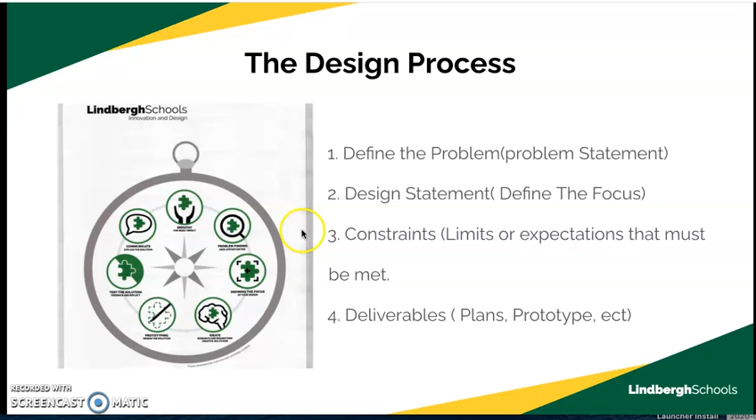The next step would be to draw those 3 design sketches. We're going to ideate, we're going to think through the problem. The design sketches should be neat, but at this point on a sketch you don't necessarily have to use a ruler or be as precise, but you still need to be neat.

You need to be able to show your ideas so that somebody else looking at your idea understands it. You don't want it to be sloppy, you want it to be neat. The step after this would be, I'd like for you guys at this point to make 3 design sketches, 3 ideas. You can do this by hand, drawing it, or you could do it digitally.

Now, in the past, we've used a program called West Point Bridge Designer, but it's only available on a PC, and we have iPads. So if you can come up with a good digital alternative to hand drawing, feel free to do that. I'm just not sure, I haven't done enough research with the iPad to see what's out there. But if you find something, share that with me, and I'd be glad to let you use it.

Once we've come up with 3 sketches, then we need to take the design that we like the most and you're going to have to actually draw this to nice scale dimensions. You want to make sure that your design is symmetrical, meaning one side of your bridge needs to be exactly the same as the other side of the bridge.

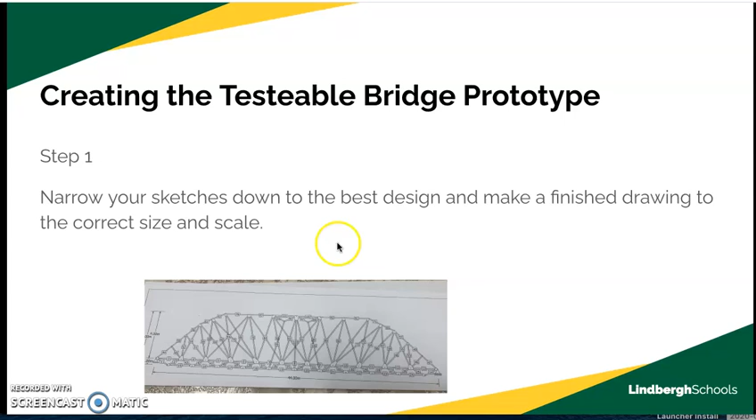Preparing the work surface. Once we have our finished drawing, drawn to the exact size, between 12 to 13 inches, 2.5 inches in depth, we are going to tape down our design of the side pattern of our bridge to a piece of foam board that I'm including in the kit.

You are going to tape that down directly to the foam board. In the kit I also include wax paper, which will go over the top of your drawing. That's going to protect your drawing from the glue we're going to use, and prevent your bridge components from sticking to the paper. Wax paper has a slick, waxy surface, so it won't stick as much. You may have to peel it a little bit, but it comes off a lot easier than if you glued it directly to your plan.

Plus, you're going to reuse that drawing for the other side of your bridge. Your bridge is going to have two sides, just like a regular bridge would have, so you're going to need to reuse your drawing. Unless you plan on drawing it twice, I would suggest you use the wax paper and just draw it once.

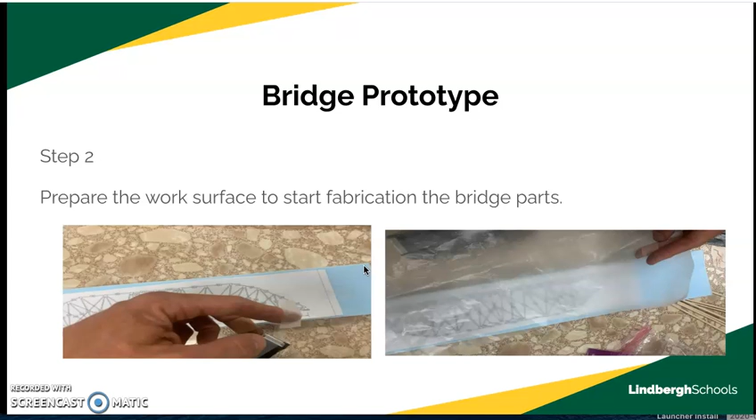Next, you'll start placing and gluing the outside bridge framework. You'll want to precisely cut straight pieces, and I would start systematically just building the outside edges of your bridge. Your kit has sewing pins in it, and the wood we're using is fairly soft, so you can pin through the wood material.

On the ends of every stick that are joining together, you'll want to put just a slight drop of glue. You don't want to get carried away with the glue. Remember that there's going to be a maximum weight, listed on your rubric, of 45 grams, a little over 1.5 ounces, closer to 2 ounces actually. So we want to keep the weight down as much as possible.

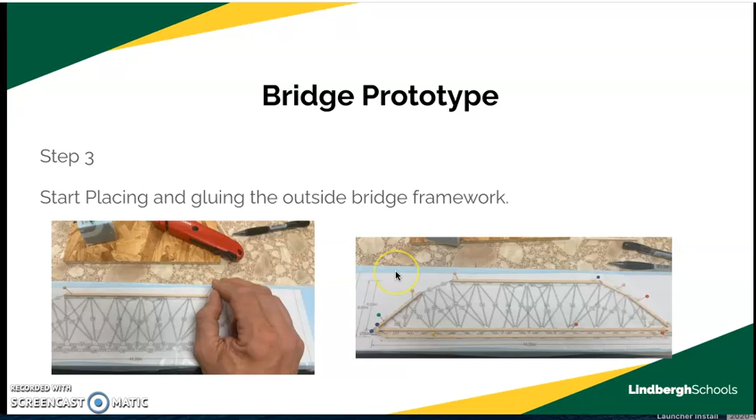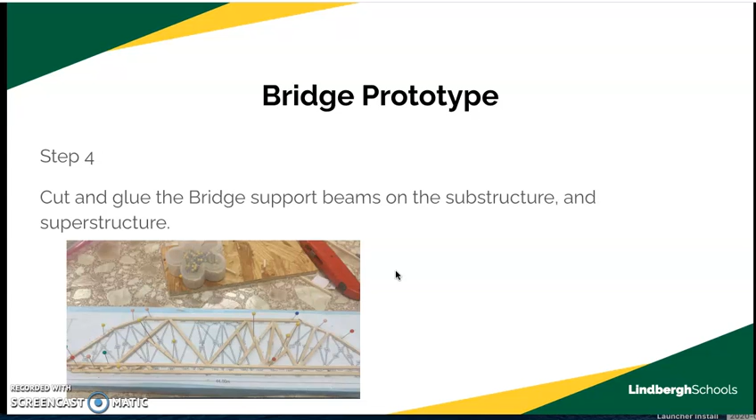Once you've built the framework of your bridge, you can start filling in the structure, like the visual here. You'll start making the braces and supports, the beams of the superstructure above the roadbed.

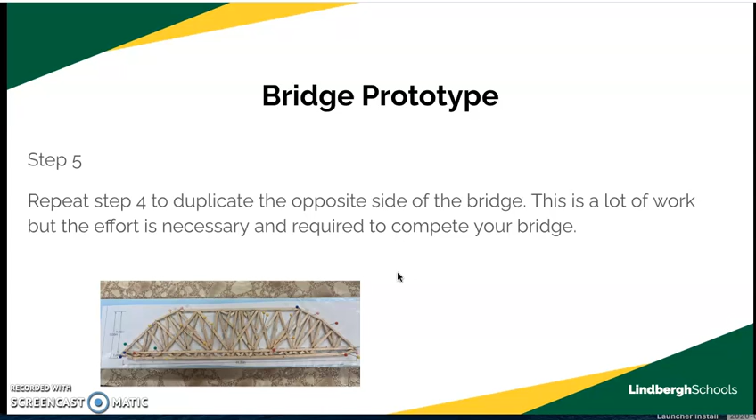Once you've done that, you're going to repeat that step and make the other side. So this is kind of what one side might look like when it's completed. Then you would have to peel that off and repeat the process to make another side of your bridge.

Once that's done, then you're going to create the roadbed. The roadbed on this bridge, I don't want it to be just sandwiched together solid material. We are actually going to make it easier to run the bolt through the middle, because we'll have some little spaces where we can easily drill up through the middle to run that bolt through.

We are going to make it so you'll have a solid length stick, and then some shorter pieces in between. So the roadbed, as you can see in this visual, is not actually solid - you'll have spaces in between. One long stick, then smaller shorter sticks, then a solid stick again, alternating solid and spacers, until you get a roadbed that is a minimum of 2 3/8 inches wide.

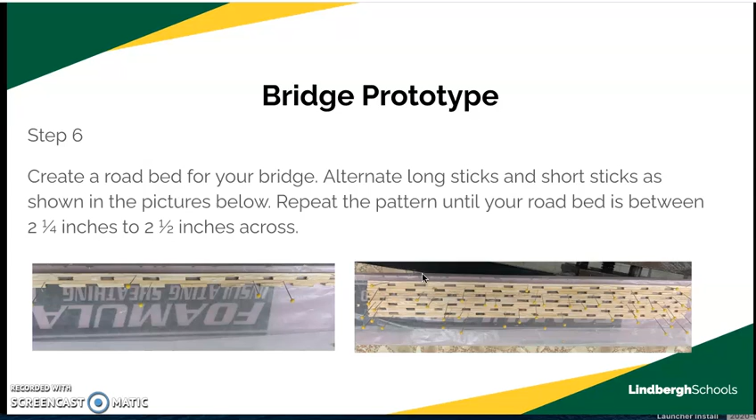2 3/8 inches is about the minimum we can do to test it. So you can have it wider than that, but we want to have a minimum width of 2 3/8 inches wide.

Once you have created your sides and your roadbed, then we can assemble all of the bridge parts together using glue and pins to hold it together until it dries.

You want to leave this for about 24 hours. When you make the sides of your bridge, make sure you wait 24 hours to allow the glue to completely dry. If you try to peel it off or lift it or move it before the 24 hours, it's going to be weak and it may break on you and cause some frustration. So let it sit and just dry - don't be impatient. Let it do what it's supposed to do.

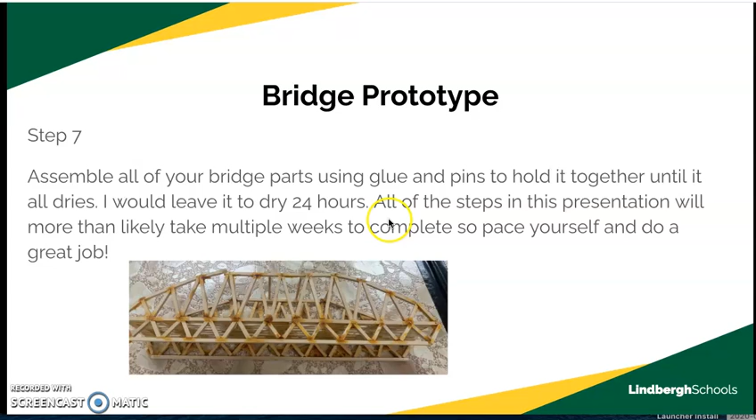The final step is going to be a bridge with integrity - it's going to be strong, hopefully. Then for the final step, we're going to test this. We're going to put a hook bolt through it, hang it from a bucket and suspend it, and we'll be filling it with sand.

Hopefully we'll be back in person by the time we get ready to do this. If not, I'll have to figure out another way, possibly to collect those from you and show you online, each one being tested for each class. Either way will work out great, and you'll have fun seeing it tested.